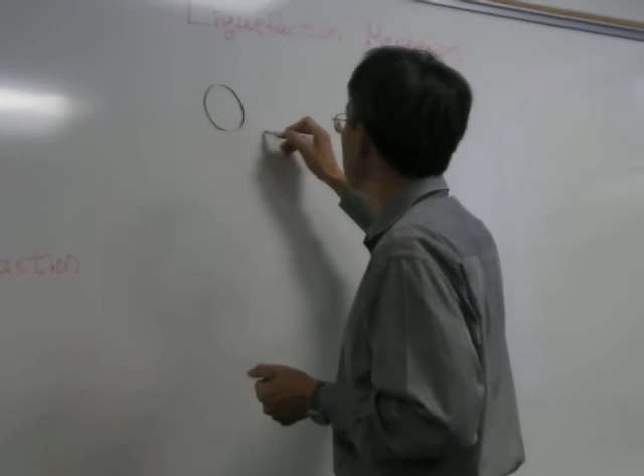Liquefaction mechanism. This is the mechanism that we already talked about in the previous class. It was something like this: we have saturated soil, okay, this kind of condition. There should be water, water, water, water. When we have earthquake motion, this way motion, those guys can move this way, and this guy can move this way, and then it will tend to change its condition or configuration something like this way.

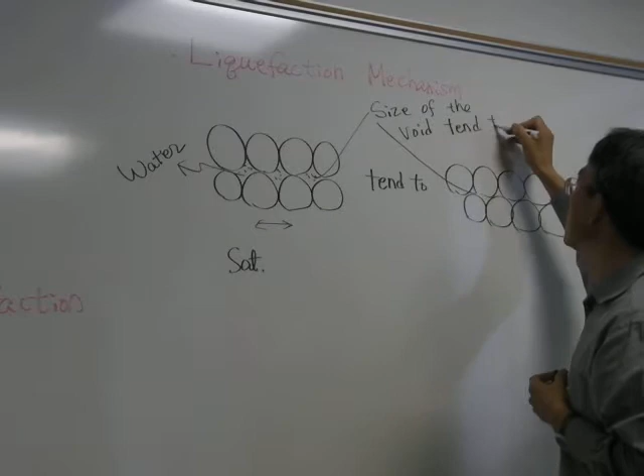When you compare this void space and that void space, we can know the size of the void tends to decrease, and it will cause pore pressure build up. Then we know that effective stress is total stress minus pore pressure. When this pore pressure is going up, then total stress will stay constant, then this guy will go down, and eventually the magnitude of this effective stress will be almost zero.

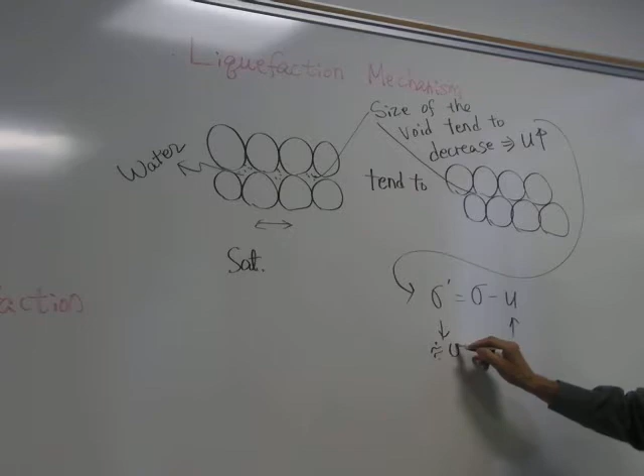Then again, for sandy soils, we know that the strength parameter, or Mohr-Coulomb's failure criteria, is C prime plus sigma prime tangent phi prime. Again, for sandy soils, this C prime will be virtually zero, so it becomes sigma prime tangent phi prime. Then when our effective stress becomes about zero, this term becomes about zero, so shear strength becomes about zero, which means liquid. That is the reason why we call it liquefaction.

Again, liquefaction does not mean our sand particles will become liquid. That means the behavior of the saturated sand will be very similar to the behavior of a liquid. Okay, this one is the fundamental mechanism of liquefaction.

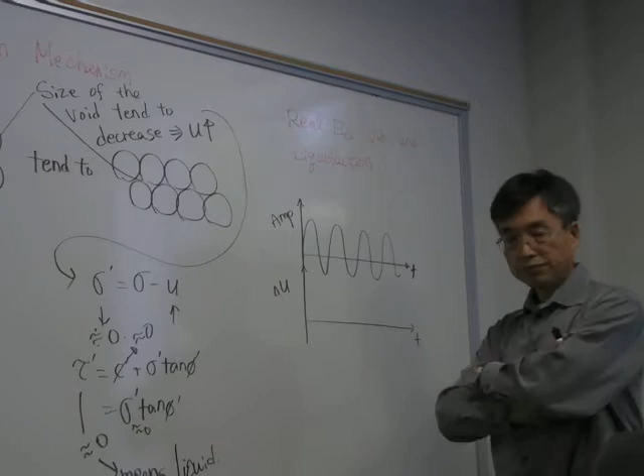You like boxing? Yeah, back in the old days. Let's say, probably you remember the guy named George Foreman. Who makes the grill now? Yeah, he makes the grill now. Do we have one? No, I don't. I got one. Is it really good? Yeah, it's not too bad. Can't put a big piece of meat on it, but maybe I will get one.

I think he really does not make the grill, but he is trying to just sell those things, right? Yeah, he's just a spokesman. But we know that he got a big punch. I guess his really killer punch is

uppercut or hook. For his punch, probably one blow will just kill us. Then let's say poor Jimmy is on the ring with George Foreman. I'll show him the ropes. Okay, then probably the only way he can win, he can beat up George Foreman is if Jimmy can hit, let's say, 50 times before he was hit. Probably he can knock down George Foreman. Is that correct?

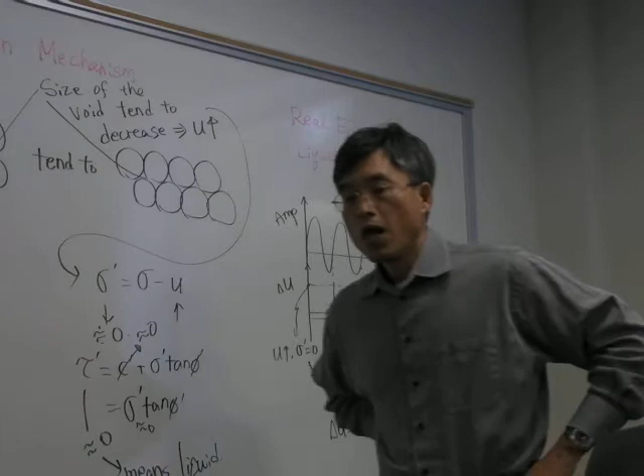We can say soils can liquefy with accumulated excess pore pressure. So far I said somewhere here sandy, somewhere here just soils. Even though I just said soils, usually it should be sandy soils.

That means clayey soils do not liquefy usually. How come the clayey soils do not liquefy? Because of the shape of the particles. It don't allow for such high void ratio. Well, it's close, but really not the direct answer.

What did you say? It doesn't have the pore spaces between the particles in this. Pore space is there in clayey soils, it's just not as much. Anyway, the clayey particles of clayey soils should be different from particles of sandy soils, right? They're flat.

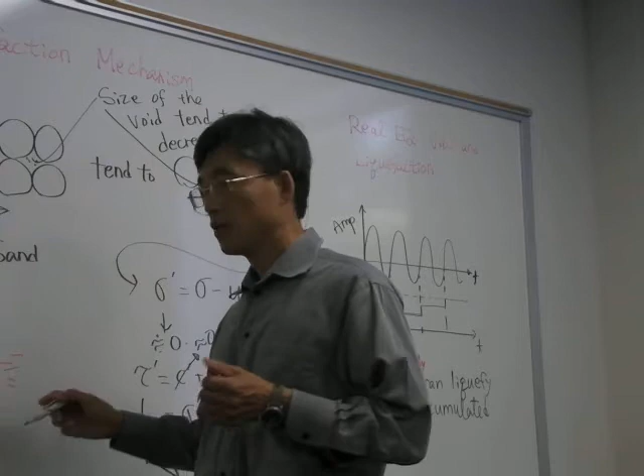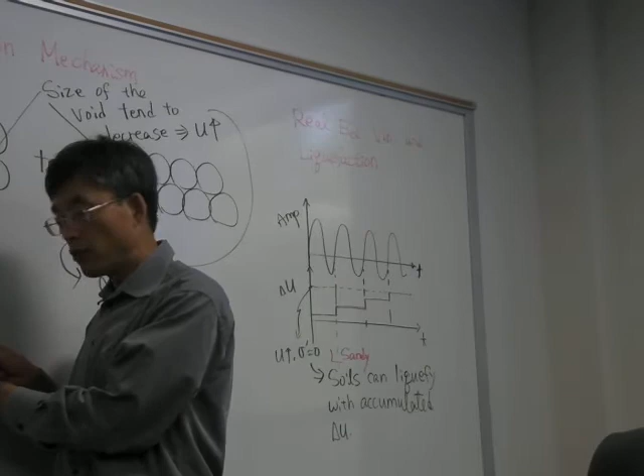They're flat, or needle shaped. Let's say we have clayey particles, and by earthquake vibration there should be relative movement, right? First of all, the size of those particles, even though I plotted them about this size, the actual size should be a lot smaller than sand size. So the relative motion or relative displacement between those particles is a lot lower than in the sandy soils. The actual particle displacement is lower.

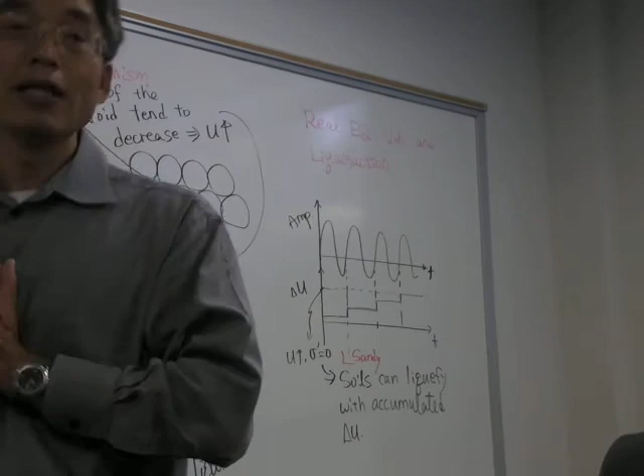Think about saturated clayey soil somewhere in New Orleans. These soils are very weak, and liquefaction is for saturated soils. But the modulus of clayey soil particles is usually a lot lower than sand. That means when stress builds up, those clay particles deform very easily, like a plate shape that can bend. Sand particles, when stressed, will try to resist. So whenever there's internal stress, clay particles bend or elongate and rearrange their configuration easily. Many times those clayey soils absorb earthquake vibration internally. That's the reason why they don't liquefy.

And gravel soils - we don't say they will never liquefy, but many times we say gravel soil is one we don't have to worry about for liquefaction. Why? Because their void ratio is so large, whenever pore pressure tends to build up, it can dissipate so quickly. So pore pressure will not increase substantially for gravel soils. When you read articles from the 80s and early 70s, you may see claims that clayey soils or gravelly soils liquefied. But nowadays we usually say that liquefaction for gravel soils or clayey soils was experimental error.

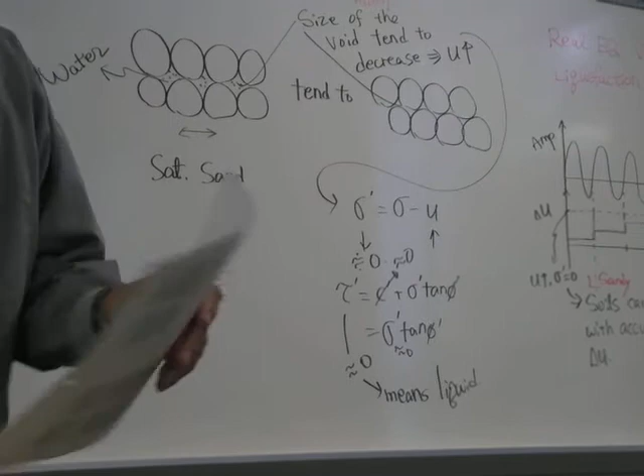Then I will talk about how we really check whether our soils will be liquefied or not.

Do you see a red pen? See it, that's fine, it's in my pocket.

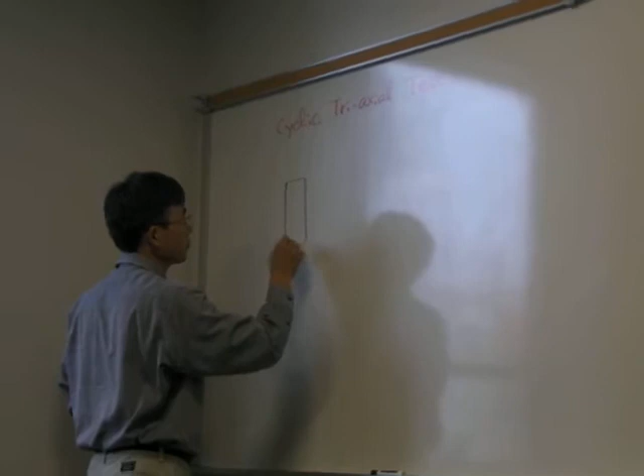To actually reproduce liquefaction, many times people use the so-called cyclic triaxial test. We have a triaxial sample, and usually what we do is apply confining stress to it. Which symbol do we use for confining stress? Sigma 3, or sigma C, short C meaning confining. Sigma 3 is usually the hydrostatic pressure, so it should be an all-round pressure.

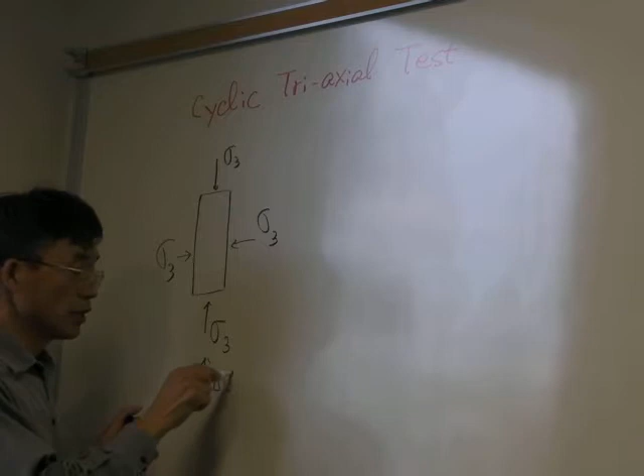Traditional static triaxial test is when we consolidate, applying this kind of confining pressure, and to fail the sample, we apply additional stress along the vertical direction. Is that correct? This is the traditional triaxial test.

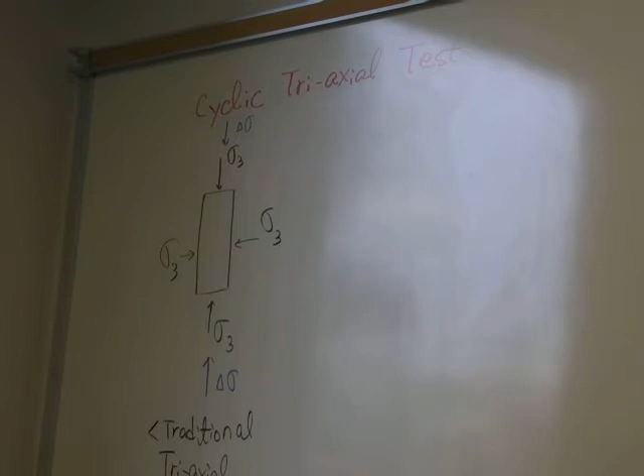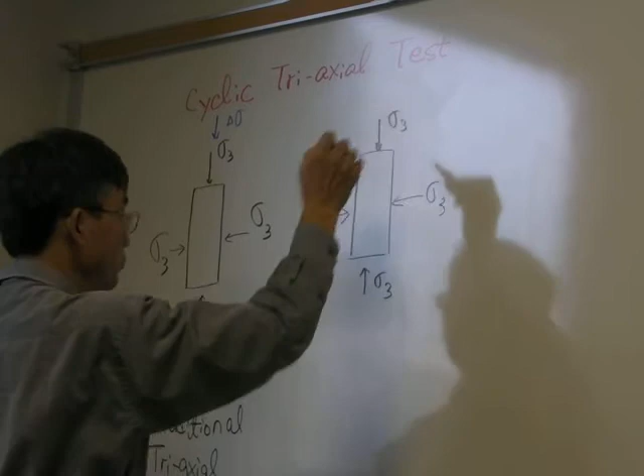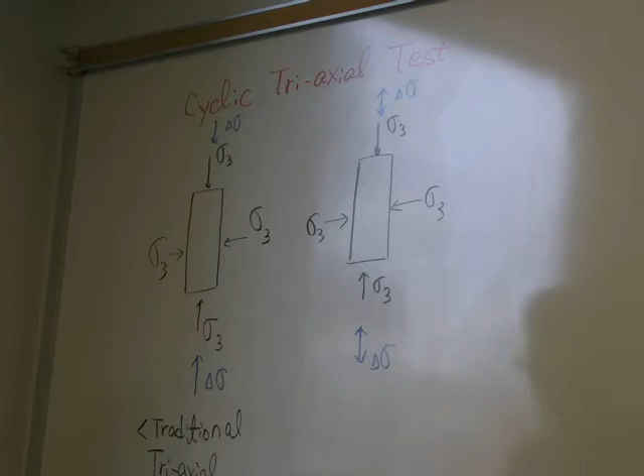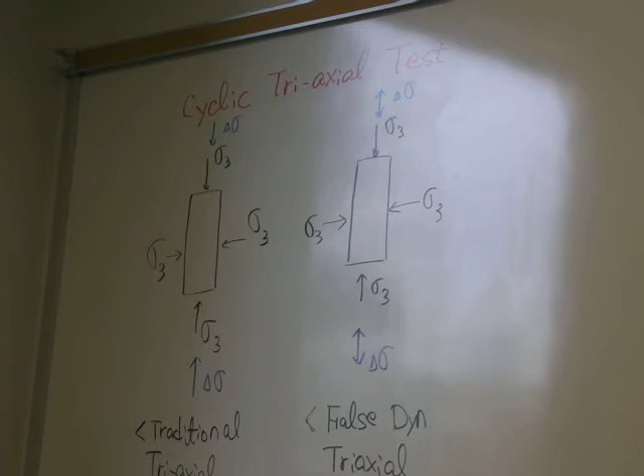Now let's think about dynamic condition. Dynamic condition should look like this - we should have initial confining stress, and for the second figure we should have arrows on both sides.

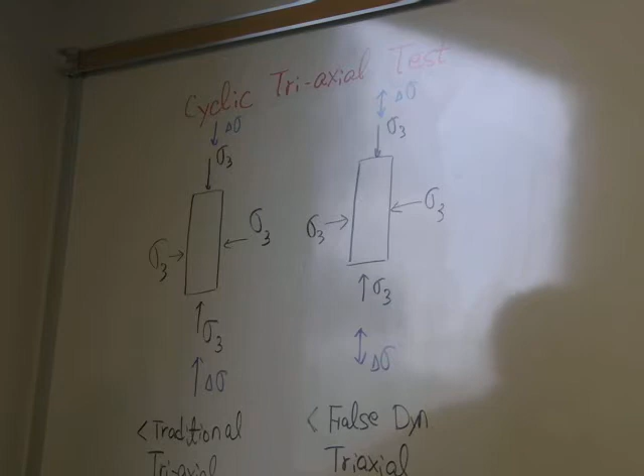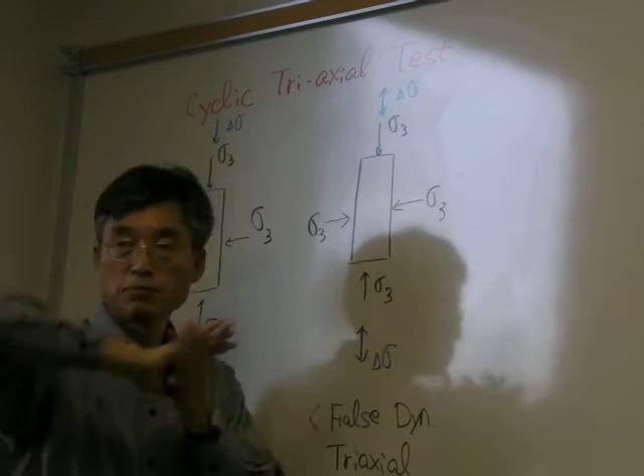Okay, think about this condition. I said false dynamic triaxial test - that means something is wrong with this mechanism. Your sigma 3 is there, and you apply dynamic or oscillating vertical stress. It looks perfectly fine, but let's say these are the soil particles. This is the loading mechanism, and I apply oscillating stress - compression, tension. Tension will probably pull out the soil particles. At the moment we apply tension, what is the stress at this surface? Compression I can apply, but when I try to apply tension, what is the stress at this surface? Zero. So that's the problem with this kind of loading condition. That's why I called it false dynamic triaxial test.

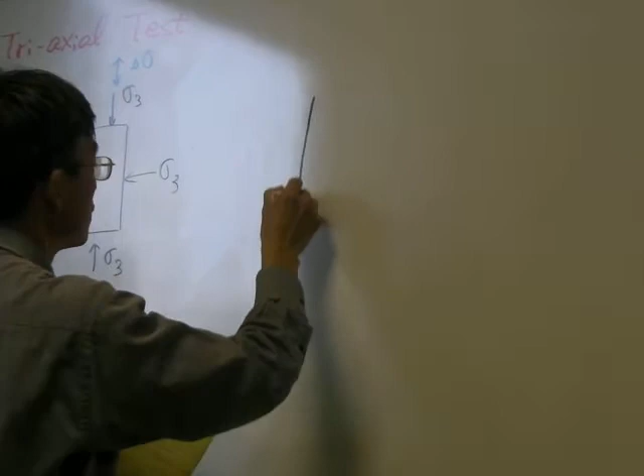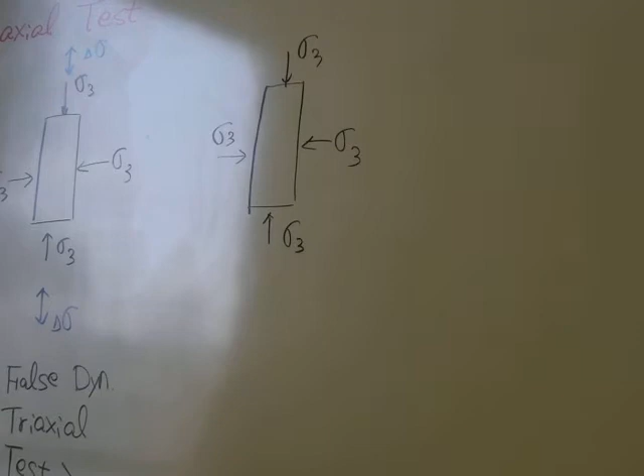Then we've got to do the dynamic test properly, so people figured out this way - this one will not work. Initially people tried to apply dynamic stress this way and figured out it's not correct. And we know people are smart - sigma 3, sigma 3, sigma 3, sigma 3. Instead of applying deviatoric stress top and bottom, how about applying stress along this way, delta sigma, and it will be high and low.

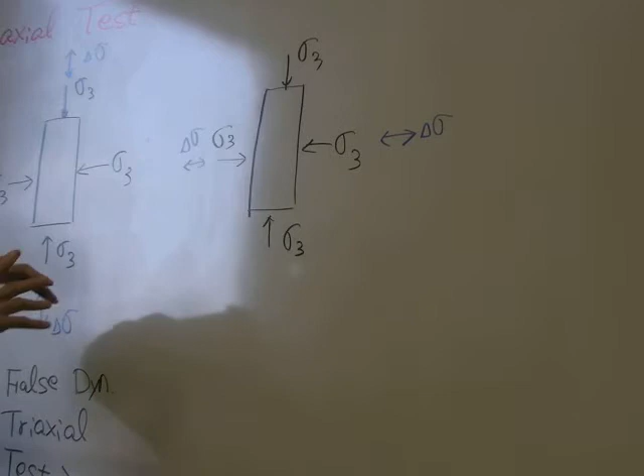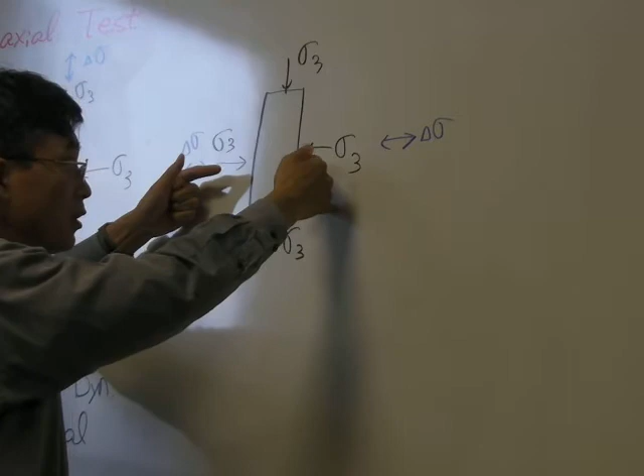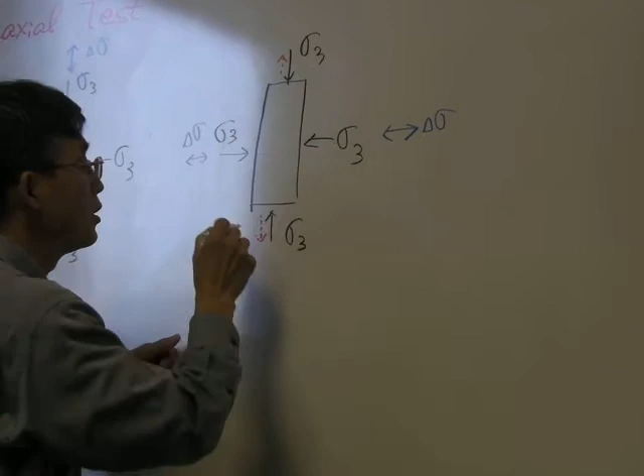This figure may appear a little different in some literature, but it's easy enough to understand this way. Our purpose is to cause tension along this direction. Think about how this loading mechanism will cause tension along this way. First, let's say we increase our lateral stress - then what happens to the deformation along this way? It will increase. It's not direct tension, but anyway we cause some kind of tension along this way using the Poisson effect. It's not true tension, so people call the actual deformation along this way extension, not true tension.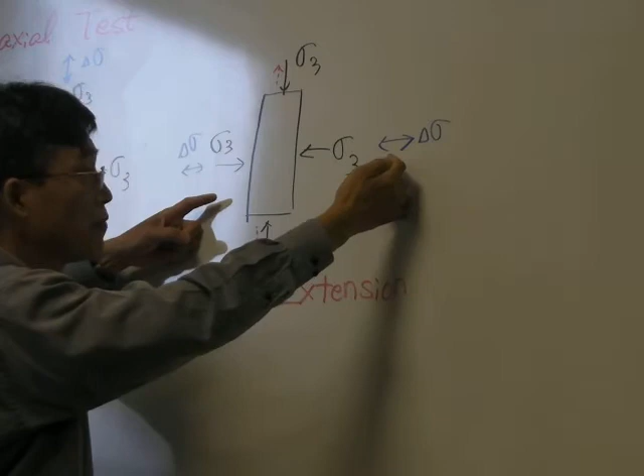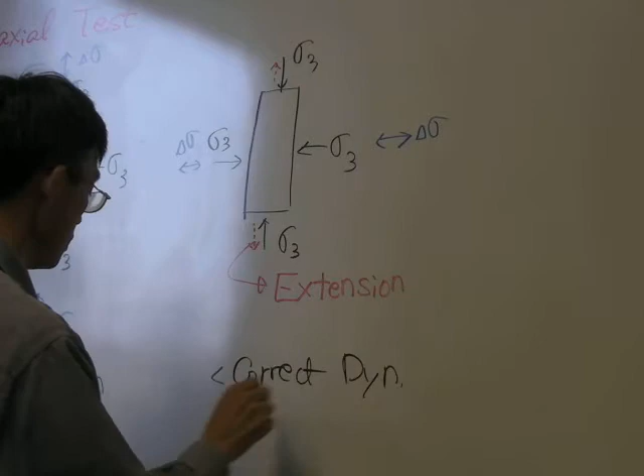Then what you do is you can reduce delta sigma, and it will be shortened. So there is a kind of maybe fake compression. But we don't say fake compression. We just distinguish tension and extension this way. Okay, so that is the correct dynamic triaxial test.

So when you actually repeat this kind of loading cycle for a triaxial sample, you will obtain pore pressure build-up at each cycle. Then finally you can see liquefaction. One loading cycle will build up pore pressure this much. Another loading cycle will build up additional pore pressure, then finally the soil will liquefy.

In the triaxial sample, triaxial cell, when your soil liquefies, you can immediately see it. How can you see it? You have a triaxial sample, right? If that liquefies, shear strength will be eventually 0. That means in your membrane, your soil just becomes some kind of liquid, and it will collapse.

For Nathan's case, he's got to do some liquefaction test, but we don't have the dynamic loading system. So what he's trying to do is he will prepare a box. He will put the loose sand, saturated loose sand in the box. He will cover it, and that cover should be watertight, because if the water can escape, it will not liquefy. So you need to cover it. It should be watertight. We got to apply some kind of stress.

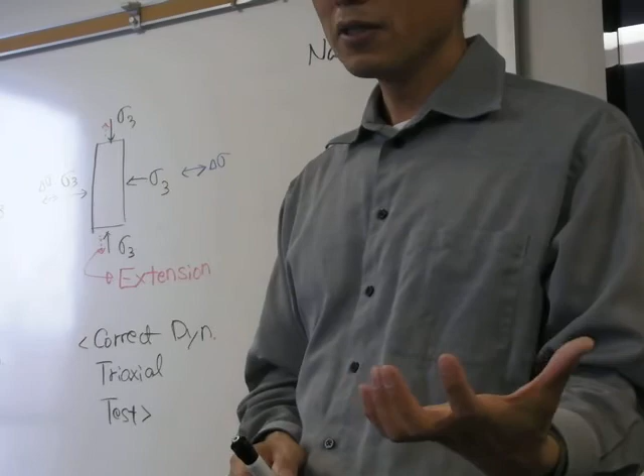What we will do is we will use Dr. Irvin's shake table. You know what a shake table is, right? There's a small table in her lab. You can shake it this way or this way. So we will try to cause vibration. This one is a kind of tension, compression vibration. This one is a kind of shear vibration.

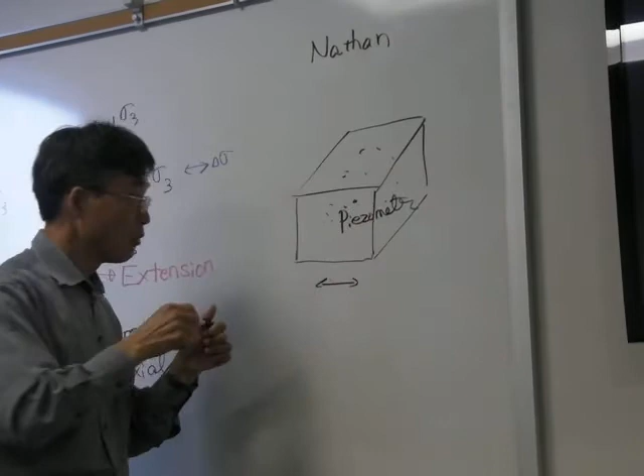And we will install a piezometer. Then when we have pore pressure build-up, this piezometer will catch the pore pressure, so we can see that our pore pressure is increasing. We will also apply vertical stress. We will see whether we will build up the pore pressure. Okay, so this one is called the shake table technique.

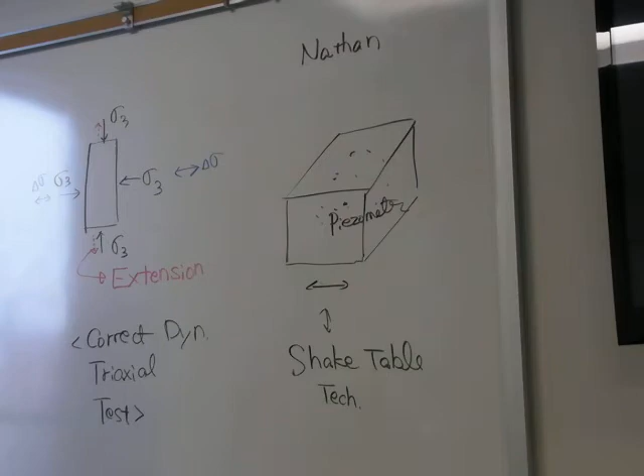And then you may wonder, hey, which technique is the better technique? This one is the better technique. Then why do people use dynamic triaxial or other testing techniques? Usually this technique is a lot more expensive than the other techniques. But the good thing for our case is we already have this shake table facility, so we will just use the existing facility.

Then probably by the end of the semester, Nathan should finish at least one test, and he's got to make us a presentation. Oh, I'll do more than one test by the end of the semester. Three? Yep, okay. Three will be even better.

If you were to draw a cross section, like the void ratio of the box, is it all the way full to the top? I mean, your material should not completely fill the box. Maybe, let's say, the current height of the box is somewhere around 8 inches. Maybe we can fill the sand about 6 inches, put the top cap. Just make sure the top cap should be watertight.

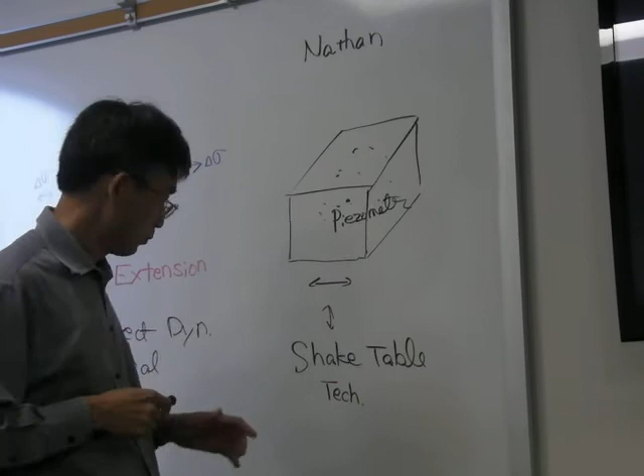And anyhow, from those tests, we can really mimic the liquefaction. Then another nice parameter we will obtain from those tests is dynamic shear strength of soils. The reason why we do the triaxial test typically is to obtain the strength of the soils, right? And using those tests, we can obtain dynamic shear strength. We need those numbers to figure out whether our soil will liquefy or not. Then I think we can talk about the liquefaction evaluation procedure.

The first thing is you need to understand this: depth, shear strength, or shear stress. What should be the shear strength profile of our soil here? Again, there should be sandy soil. Sandy soils have 0 cohesion. Then our shear strength equation should be sigma prime tangent phi. As depth increases, our sigma prime will increase linearly. This phi is constant. So we know that our shear strength will increase linearly from 0 to something like that.

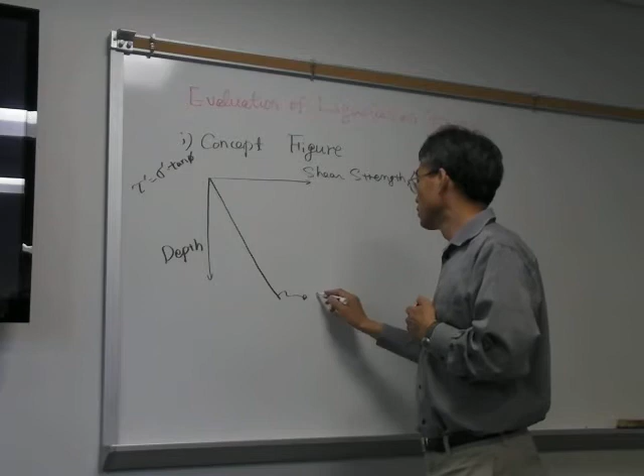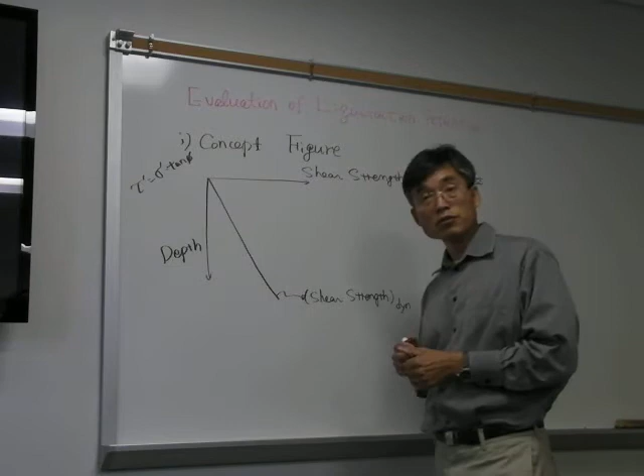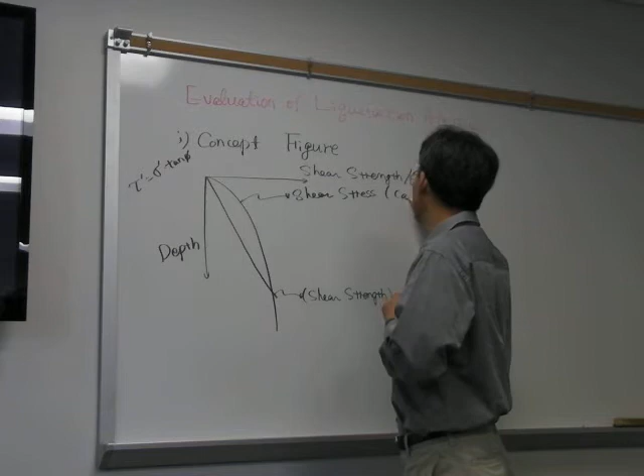Let's say this one is the dynamic shear strength. Then let's think about shear stress caused by earthquake motion. We do not know whether shear stress caused by the earthquake motion is linear or not linear. To make it general, we will say it's not linear. So I will say shear stress caused by the earthquake will go this way, caused by earthquake vibration.

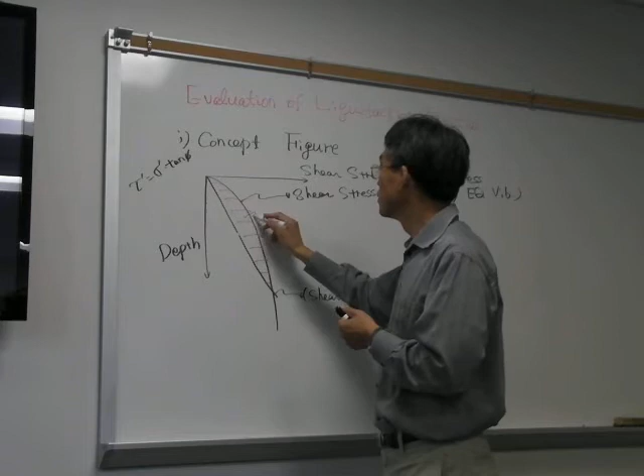Conceptually, what we can know is, again, this one is our shear strength, this one is the shear stress caused by earthquake vibration. Then we know that somewhere here, is this the zone that shows possible liquefaction, or the zone that shows no liquefaction? Liquefaction - the zone of possible liquefaction, because shear stress caused by the earthquake is higher than the shear strength of the soils, right? So I would say this should be the zone of possible liquefaction.

Okay, so now we understand the concept. That means you do whatever analysis based on whatever technique you know of. If your shear stress caused by the earthquake is higher than the shear strength, we can say we may have liquefaction. Then the next question is, how can we define this line and this line?

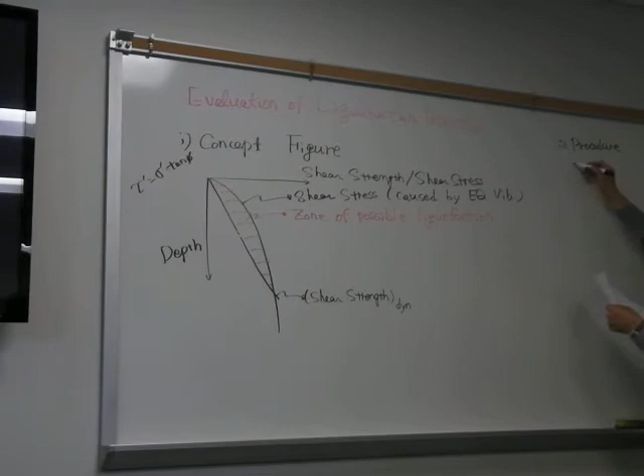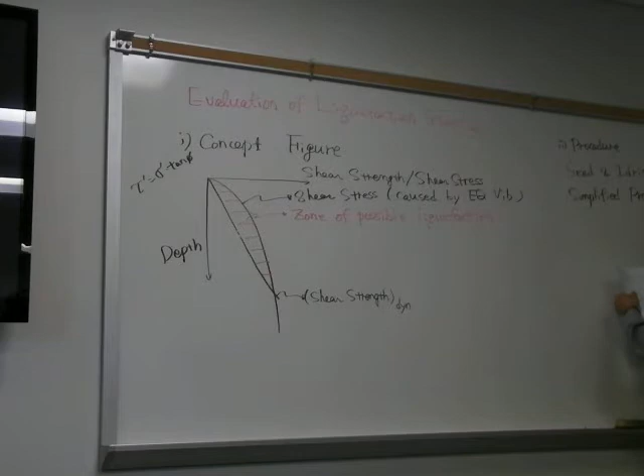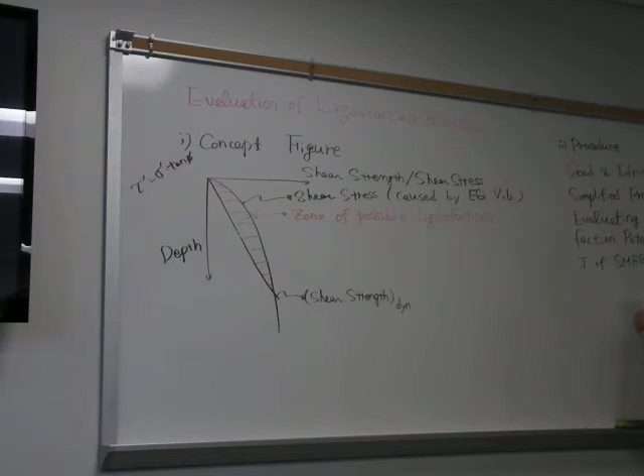To figure out the detailed procedure, you need to read this article: Seed and Idriss, 1971, 'Simplified Procedure for Evaluating Soil Liquefaction Potential,' Journal of the Soil Mechanics and Foundations Division, ASCE, Volume 97, number SM9, starting page 1249.

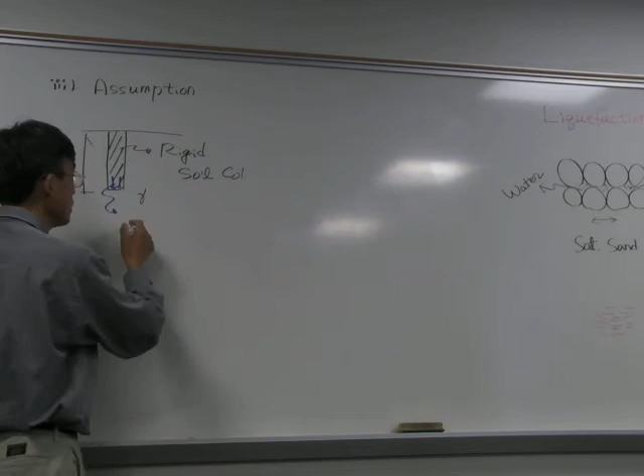Assumption: think about a rigid soil column that has depth h and unit weight gamma. Then the vertical stress acting at the bottom of this soil column should be somewhere here at the bottom. Vertical stress should be gamma h.

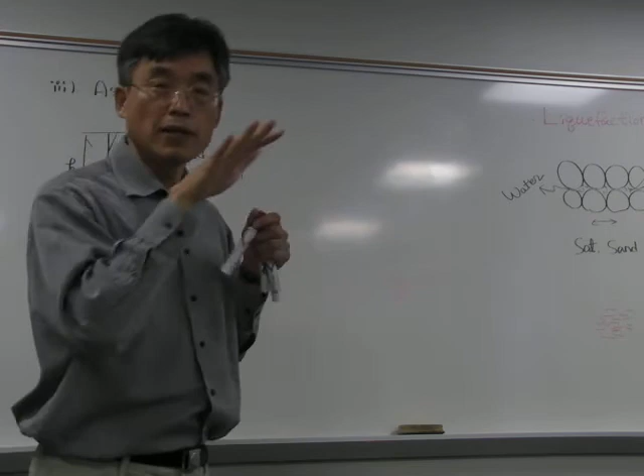When this soil is subjected to earthquake vibration, let's say horizontal vibration, that motion should have certain acceleration, right? So we will say that acceleration is A, horizontal acceleration. Earthquake vibration is a kind of random vibration, so each vibration will cause different acceleration. So we will just pick the maximum horizontal acceleration. Don't ask me why we choose max and not average — I'll talk about why we chose maximum acceleration a little bit later.

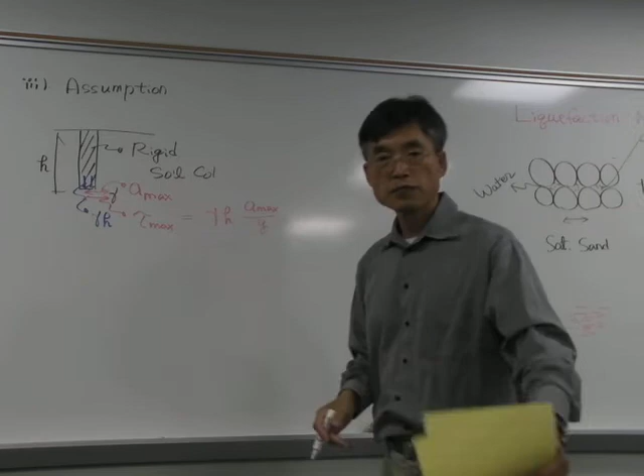Then think about the maximum shear stress caused at the bottom of this soil column. Let me write down the equation first, and you may be able to figure out the reason why immediately: gamma h times a max over g. Can you understand this expression?

Okay, forget about that for now. This gamma h is the vertical stress. And let's say a max is 0.2g. Then a max divided by g is 0.2, correct? That means in that case, our shear stress is 0.2 times the vertical stress. Does that make sense?

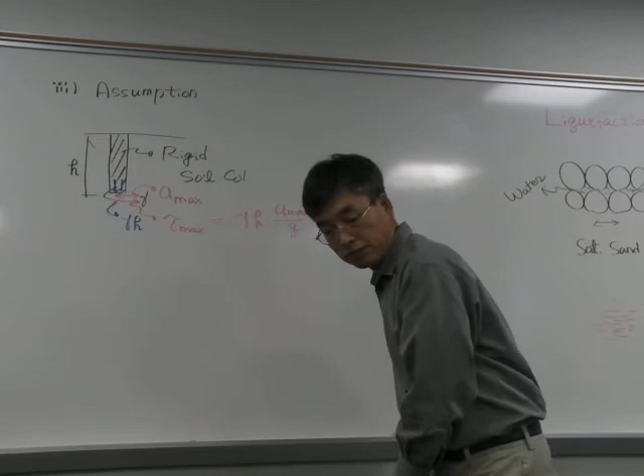So far the concept was not really a dynamic concept, because in this equation we assume the dynamic relationship is really the same as the static relationship. We will modify this expression to consider some uncertainties in dynamic relationships. I would say tau max dynamic will be gamma d times tau max. This gamma d is just the correction factor.

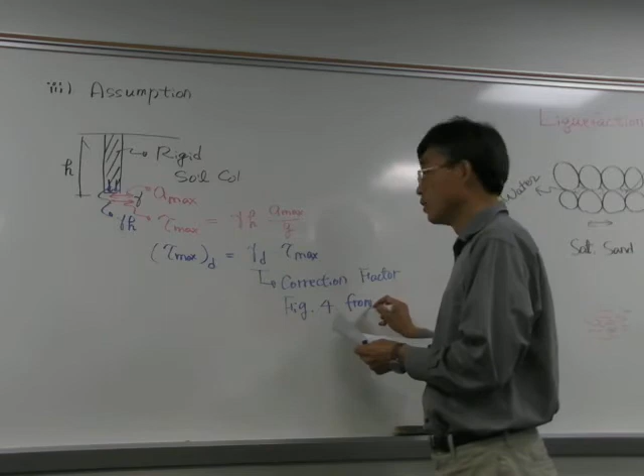And how do we find out this correction factor? There should be figure 4 from that reference, Seed and Idriss — maybe 0.7, 0.8. Again, that's the empirical correction factor. The reason is this relationship is the one that we borrowed from the static condition, so we don't actually know whether it reflects the dynamic condition properly. We just borrowed the equation from the static condition — we don't know whether the same relationship can be used for dynamic condition, so we just added some correction factor for dynamic condition.

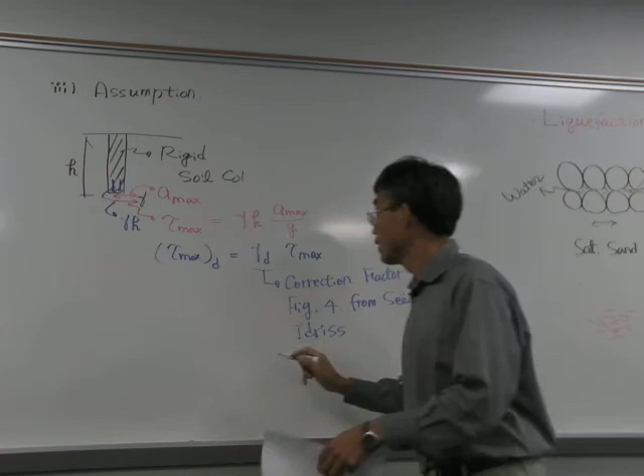Then when we plug this expression in here, we can rewrite it: gamma d, the correction factor, times gamma h, a max over g. Don't be confused with this gamma d and this gamma — this gamma is the unit weight, this gamma d is the correction factor. I don't think gamma d is really the proper symbol here because it can cause confusion, but it's a kind of universal symbol, so we have to accept it.

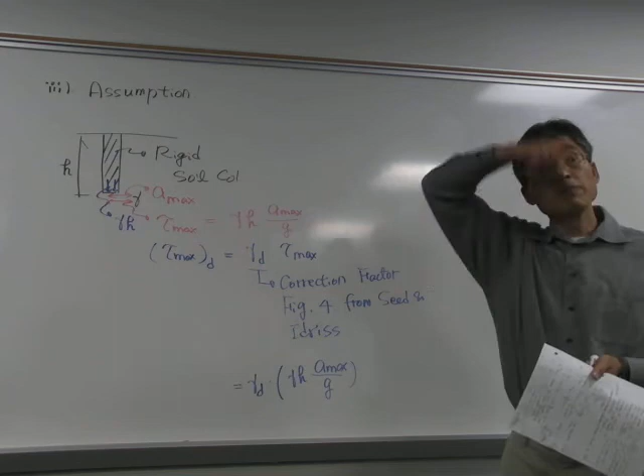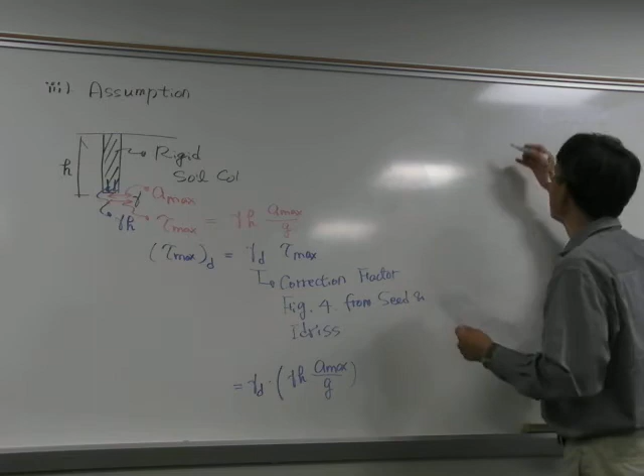So far we used A max, the peak acceleration. When we have earthquake vibration, we will have only one peak acceleration. But we may want to account for other vibrations too — how can we incorporate them? It may be better to use the average acceleration. And we say tau average dynamic — now you will understand immediately why we learned this number in the previous class, 0.65.

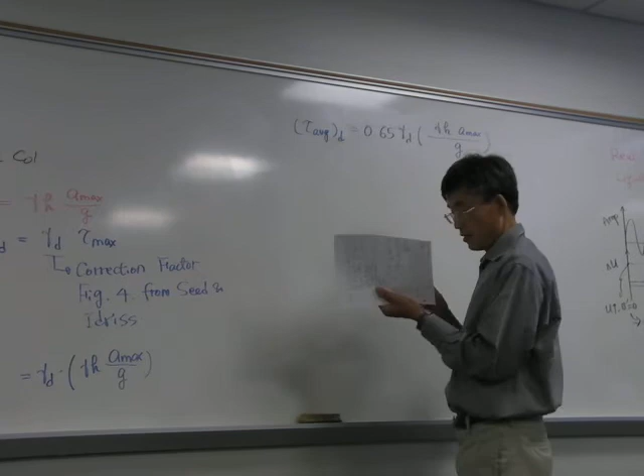Gamma d, gamma h, over a max over g. I think now I don't have to explain why this one is 0.65 — we all accept this number, I guess. Actually, that's the whole reason why we spent time in the previous class figuring out why 0.65 is there. Again, if you want to use 0.85, you've got to develop the whole procedure again, but it's not worthwhile. So I would say this is equation 1 — again, this is the shear stress caused by the earthquake.

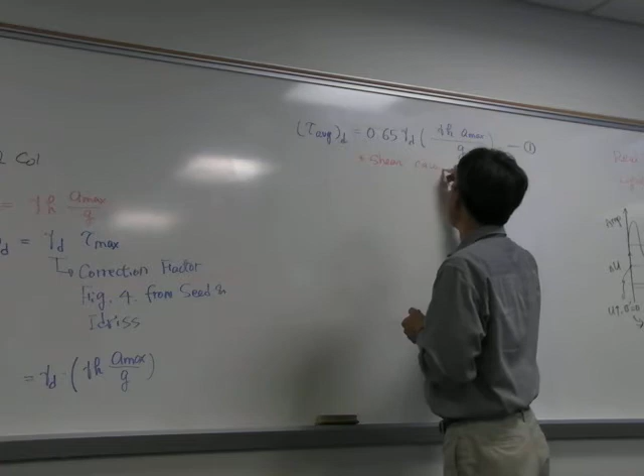This is the shear stress caused by earthquake. If I show the shear stress in this figure, there is really this one — this line should be equivalent to equation 1, the shear stress caused by the earthquake. Then let's think about dynamic shear resistance, or shear strength.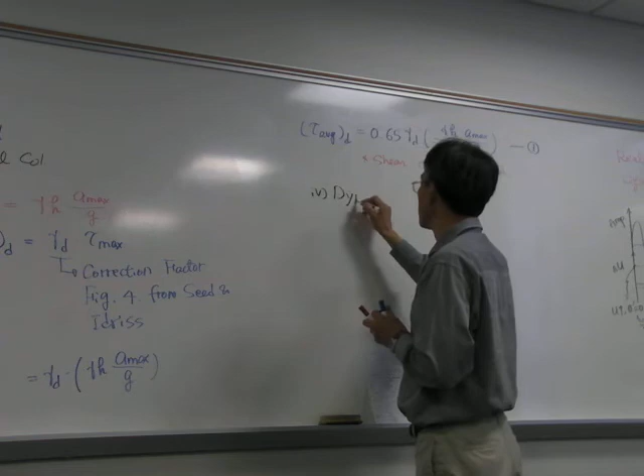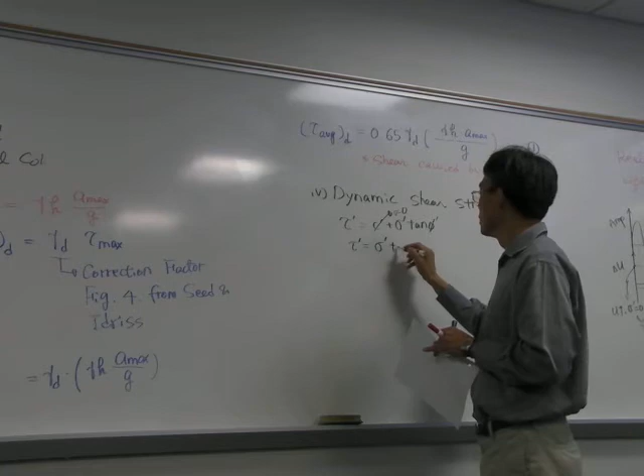Dynamic shear strength. Don't forget that our shear strength equation is C prime plus sigma prime tangent phi prime. But for sandy soils, C is about equal to 0. So our shear strength equation is sigma prime tangent phi prime. Then I will rewrite this equation in terms of tangent phi prime. Tangent phi prime should be tau prime over sigma prime.

Tangent phi, or phi itself, is a unique soil parameter. Phi can be 30 degrees, 20 degrees, whatever. So I will write one conceptual equation here: tau prime over sigma naught prime.

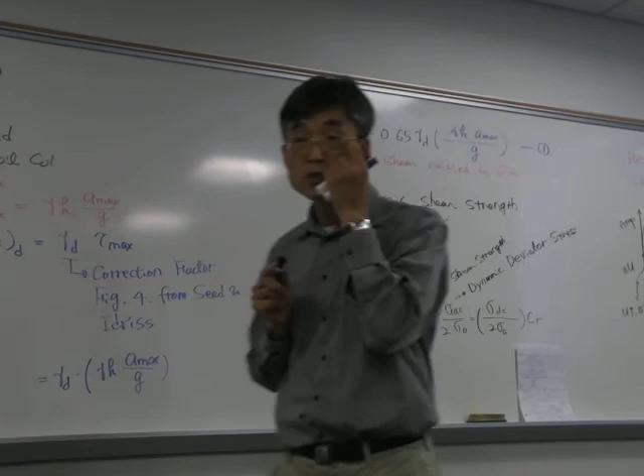So I just changed this one: shear stress is 1/2 the deviator stress. Essentially this one and this one are the same equations.

Then this one is the field equation, still the dynamic deviator stress. Instead of sigma naught, we replaced it with sigma A, and we put in the correction factor. Sigma A is the ambient initial ambient pressure.

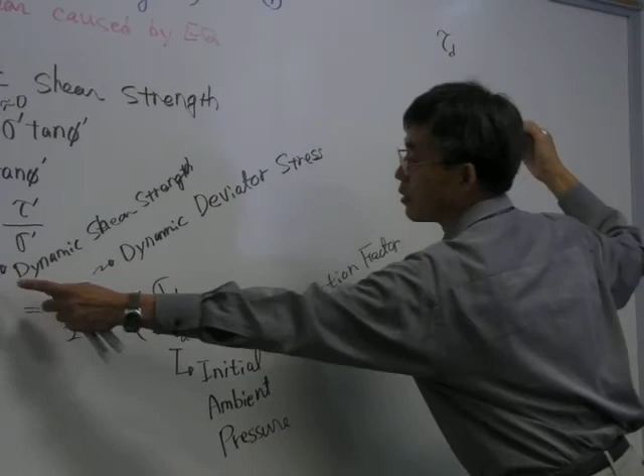From this relationship, what we can do is: dynamic shear strength should be sigma D C over 2 sigma A, times C R, times sigma naught prime. I just rewrote this equation in a different format. I will call this equation 2.

That is dynamic shear strength. Again, as always, this dynamic shear strength of sandy soil should be a function of depth, shown as this pressure.

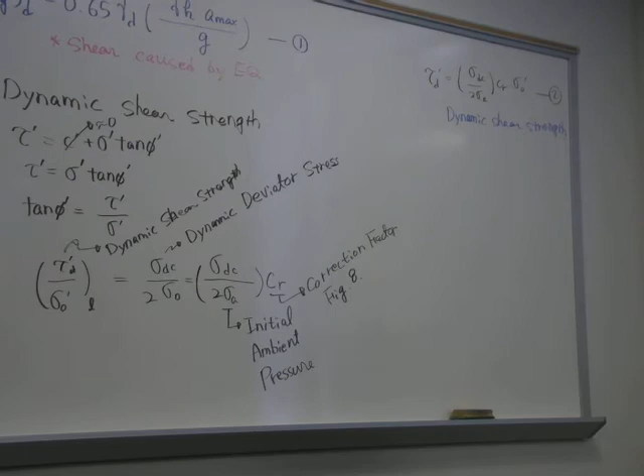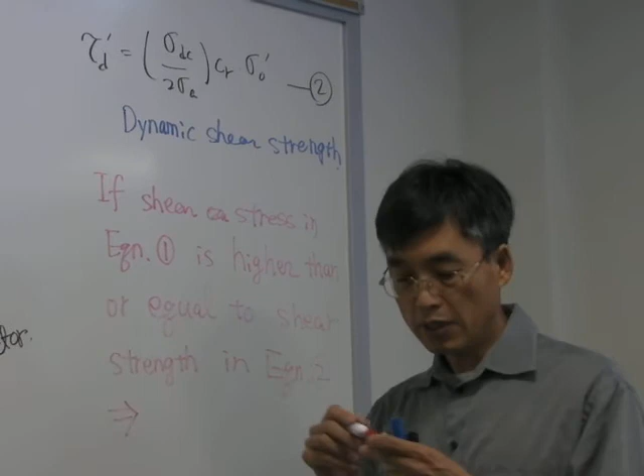If shear stress in equation 1 is higher than or equal to shear strength in equation 2, then what should be the consequence? Liquefaction—we have liquefaction.

Any questions about how we can evaluate liquefaction susceptibility or liquefaction potential? This is actually the classical procedure for evaluating liquefaction susceptibility. After their research, their approach was improved, and nowadays we have similar techniques with a little more corrections. We also have some techniques, actually those are also proposed by Seed and Idriss.

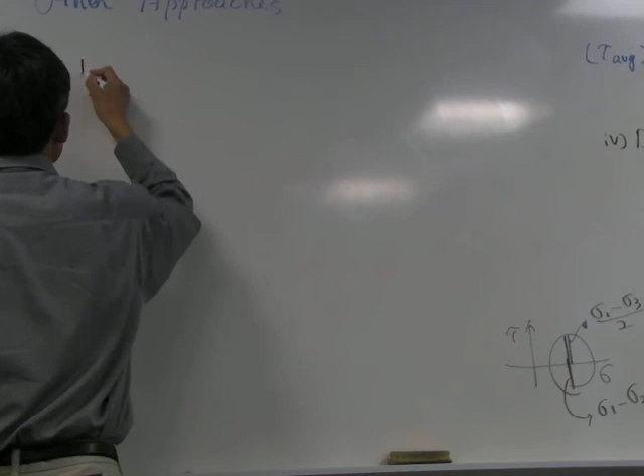It's something like this. You may think of soil strength represented by SPT blow count, N, or maybe N60. And this is the ground acceleration. It depends—you may use A average, but many times people just pick the peak acceleration because it's easy.

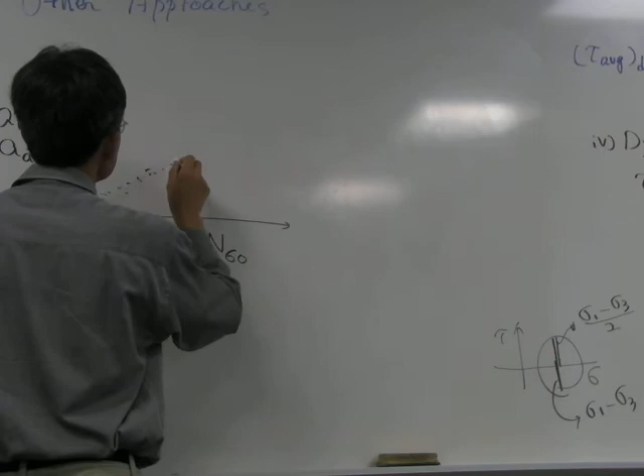Seed and Idriss and many other people collected a lot of field data. They figured out that when SPT blow count is, let's say, 30, ground acceleration was somewhere around 0.15, whatever. They collected this data, analyzed it, and figured out that for N60 somewhere around 25, it was liquefied—this point was liquefied.

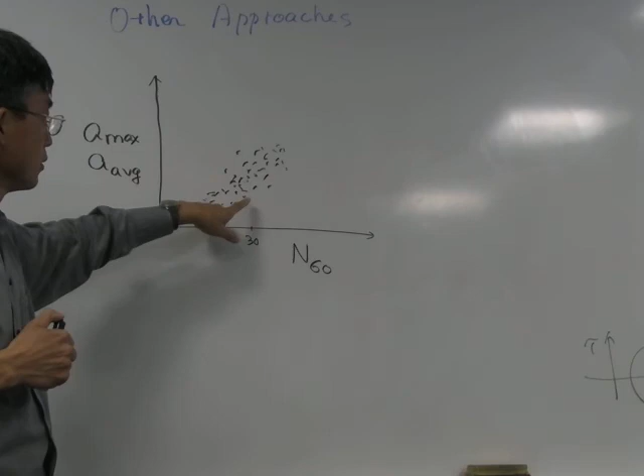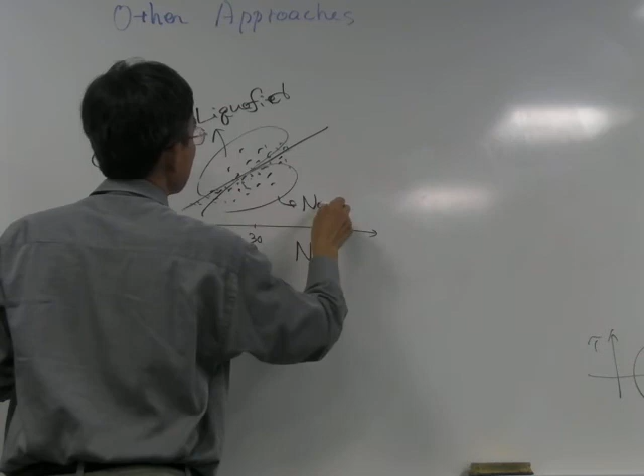This point was not liquefied. So from this empirical data, they figured out that above this line is liquefied, below this line is not liquefied. It's a very easy chart—you don't have to go through the detailed procedure, so this technique is also used. Instead of N60, you can also collect the same data based on cone resistance, cone-tip resistance. Liquefied.

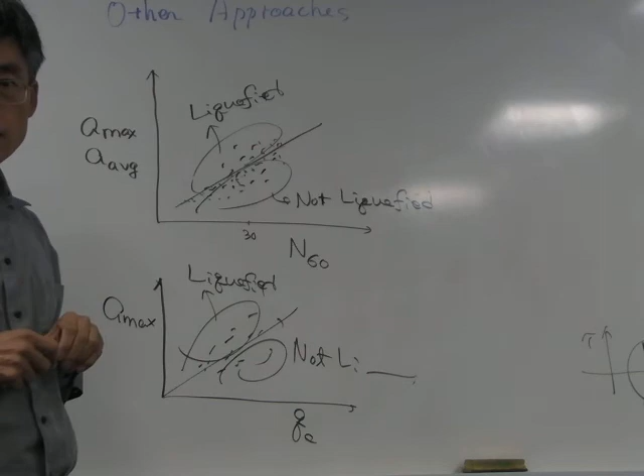Nowadays people try to improve these techniques, and they just massage those numbers. Some people say instead of Amax they say CSR, some people say DSR, whatever. But eventually the fundamental idea of those CSR or DSR is based on this concept. You have to figure out what are all those: cyclic stress ratio, dynamic stress ratio.

So that area between the two curves, is that the liquefaction potential? No, it's not called liquefaction potential, it's called the liquefiable area. Liquefaction potential is not a single number or a single region. Liquefaction potential is something like: if this stress is actually higher than this strength, or this shear stress is very close to the strength, then you can say it has high liquefaction potential. You don't say liquefaction potential is 0.8, 0.9, whatever. If this one is a lot lower than this one, you can say low liquefaction potential.

Any other questions? How many different ways are there to figure out the liquefaction potential? Over 20? I don't know, but at least I would say at least 20 different approaches, just among those ideas.

Could you not just do the SPT test and also take the bore log, and say you can tell? If you know if it's going to liquefy, you could correlate the classification of the soil to whether it liquefied. Oh yeah, there are some indirect approaches too.

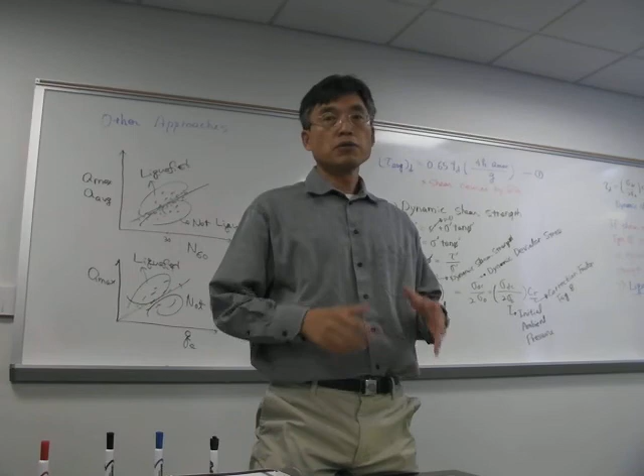Also, it has something to do with depth. When you see this figure, somewhere down here it shows that the shear strength of the soil is higher than the shear stress caused by earthquake motion. Then no liquefaction. So depth has some effect.

Void ratio - I did not talk about the void ratio, but you can expect, when we have liquefaction, whether it's high void ratio soil or low void ratio soil. High void ratio or low void ratio soils? High void ratio one - high void ratio means loose ones.

So what depth can liquefaction happen at? It really depends on the soil types, but as a rule of thumb - do you see any number? Around 30 feet, about 10 meters, 30 feet. If the soil is usually deeper than 30 feet, we hardly have liquefaction. Is that because of the confining pressure? Because of the confining pressure - high confining pressure means it's not really easy to move those particles.